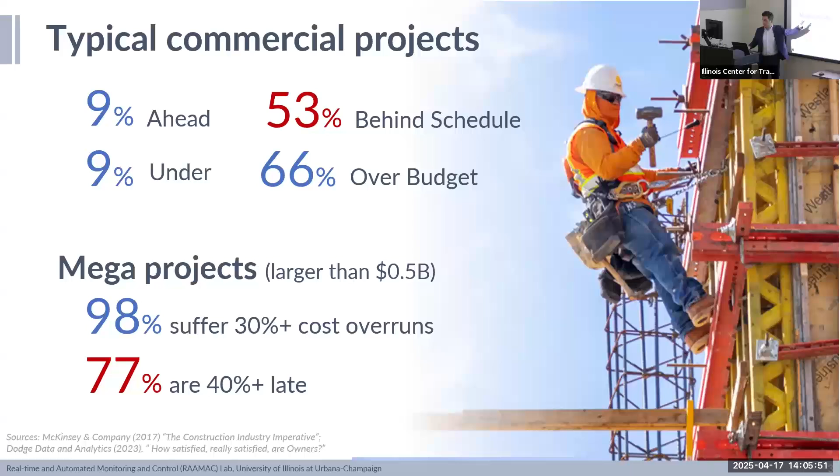Every single day, Meta does $60 million of work. $60 million of work a day, before 5 p.m. That's how much money we spend on construction. So you can see how this coordination issue and keeping their projects on time can make a huge impact on work in progress. Now, many of you have a transportation background, and some of this might be relevant to you, but if not, I'm basically giving you a glimpse of what happens in construction.

Every project that we do always starts with a plan. We go and execute that plan, and from time to time, we check to see if we can compare what really happens out in the field against that plan and make adjustments.

Now, over the years, we've added new theories in construction. One of them is what we call last planner. Anyone who's been on the job site might have heard the term pull planning. It's a practice of bringing a foreman to a meeting, that's the gathering of planning and execution that you see on the side. But the gist of it is, all we are trying to do is understand how we can find the delta between reality versus the plan and make adjustments.

Within this workflow, there are 4 specific problems of why projects are falling behind schedule. Number one, like I said, over the past few decades, the broader scientific community in construction worked on a number of theories called last planner, which the idea was really, really simple. Instead of running a team by having someone come up with a schedule, ask the people who execute the task to give you the estimate of how much work needs to be done.

What really happens is you take a team that does, on average, let's say 1,500 to 2,000 activities in the life of a project, to a process where now you do 20,000 activities, that you need to coordinate, who does what work in each location. Every one of these sticky notes you see is actually one card that shows you one company doing one task a day, and that's the practice that we have. When you want to coordinate this much work, you need to have someone as a champion on the job site to guarantee and communicate the work that needs to be done.

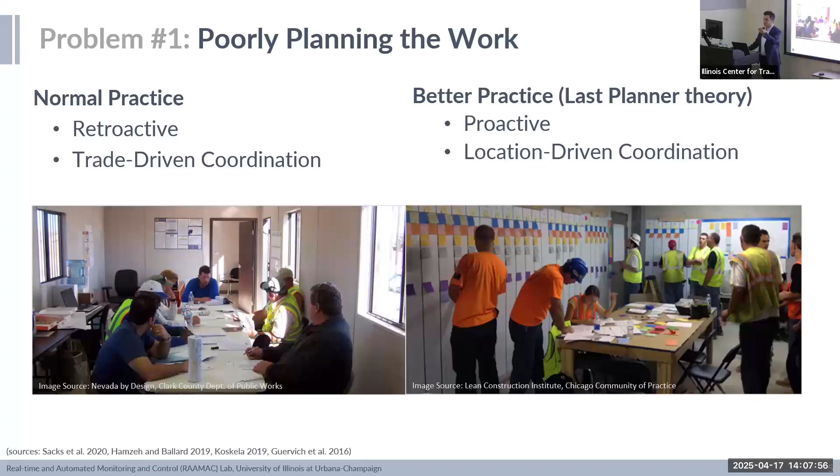I'm just making fun so I can engage in conversation. Not only are we not necessarily good at planning, but when it comes to executing our plans, there's a lot of room for improvement. Over the past 15 years, I've been surveying every superintendent in construction on why things aren't working according to plan.

They give us feedback on all sorts of things. They show up and the work plan has changed because the project manager decided on a different approach. You show up and another subcontractor has occupied your space. Resources might not be available to you. If you look into these reasons, almost 80% of these issues are preventable.

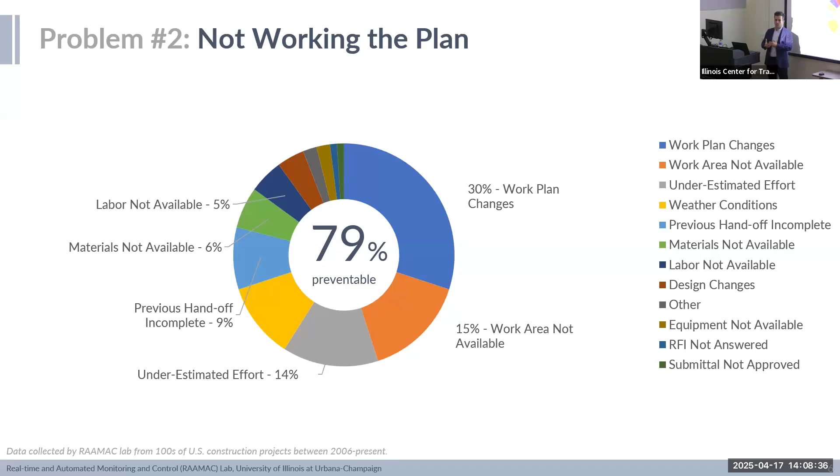The problem is all of our projects are understaffed. So people on the job site don't get visibility into what's really happening there, so they can't react to it in a timely fashion.

Third problem: the way we monitor construction progress on job sites. How many of you have walked into a trailer and seen a 2D drawing on the wall that's been color-coded? Anyone? That's the first thing you're going to see if you ever walk into a job site.

Now, I say modern EV plant—I know this is being recorded, but my understanding is it's for affiliates of our program. This is a Ford facility in Michigan. It's an EV plant, a very modern plant planning to build the type of vehicles you do research on. But looking at the construction practices, this is the same as they've been doing since the 80s.

You wait for the entire week, contractors show up in the room, and you ask them to color code the areas they've been working on. So from the time the problem happens to the time you get visibility into it, you've effectively lost a week of time.

The last problem: not only do we have problems with the way we plan, execute, and monitor, we don't even use that data to update the plan. The people engaged in planning are usually not even on the job site, so they're always missing that feedback loop of how much work really happened there to use as a basis for updating the plan.

Now we call that engineering judgment, but it's really just a gut feeling of how much I think everyone can do on the job site, so I can come up with that plan. So again, there are 4 specific problems: the way we plan it, execute it, monitor it, and use that data to update it.

So we put ourselves on the path of solving these problems with only one form of data—a type of data that, if you put it in front of a superintendent, an owner, or a designer, everyone understands how much work has been done, and you can contrast it against your design. That form of data is visual data.

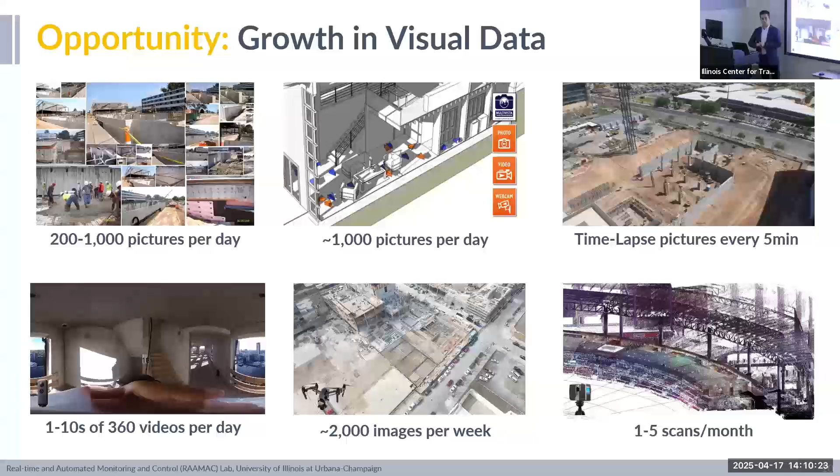So what do I mean by that? If you ever come across job sites, you're going to see people taking photos. The most dominant form is using a phone, walking around the job site and taking pictures. How many of you have used your phone to take a picture of a job site or visit you had? All of us, right? That's the same in construction.

For liability reasons, many owners in the US and overseas hire professional photographers who walk the job site and take photos for them. Any guesses how much money these guys are making on an hourly basis? Pick a number.

Go up. How much do we make as GRAs? 20, 30 bucks, right? So let's have a benchmark. We pay $200 an hour for professional photographers who show up on the job site to take photos for liability reasons. It's a good opportunity for this summer.

We also have time-lapse photography. Many of our job sites have fixed cameras, and we also use them in transportation projects. Superintendents love to use action cameras—these are 360 cameras you can easily place over your hard hat, walk around, and videotape.

Construction is the #1 market for drones. It's larger than agriculture, it's larger than transportation. And we use a device called laser scanning that's also used in transportation. This is less frequently used, mostly for high precision tasks, but these are all different forms of visual data.

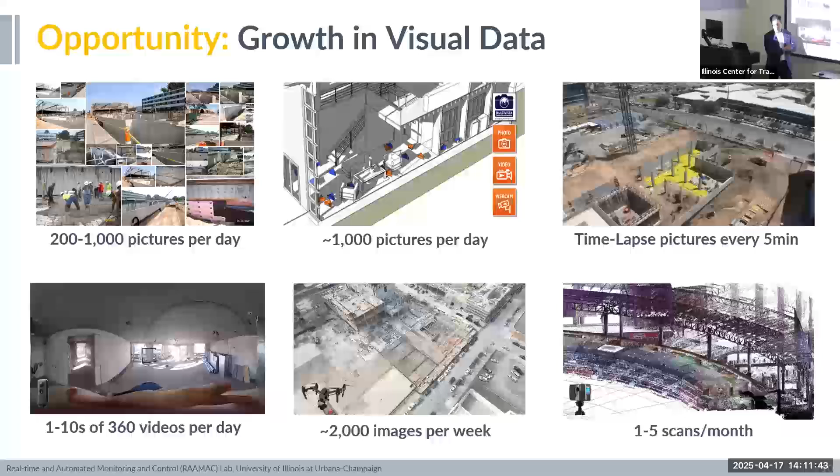So what we wanted to do is see how we can take this data and use it to represent what really happens on the job site, and then use that to communicate what work is coming up.

On the other side, we had to look into what we can bring from a design perspective. Over the past two decades, we've advanced a concept called building information modeling. I'll show you some examples in the world of transportation. It's not very dominant there because conflict resolution in engineering doesn't take as much effort as it does in building, so it creates more value from a building perspective. But it's still something people explore in transportation too.

The idea is very simple: you take that design model, take a project schedule, and integrate them so you can create a sequence of the work. Before the job starts, you can use that to coordinate and communicate what work is coming up. Over time, you can use it for constructability reviews, safety reviews, and so on.

I want to give you an example—I try to bring as many transportation examples as possible. This is Oakland Bay Bridge in California. You can see what Caltrans, together with AECOM, had done at the time. Here you can see the animation of construction, and you can also see active traffic. We actually use data from traffic engineering estimates to understand how to make the job site safe during construction and to look into constructability.

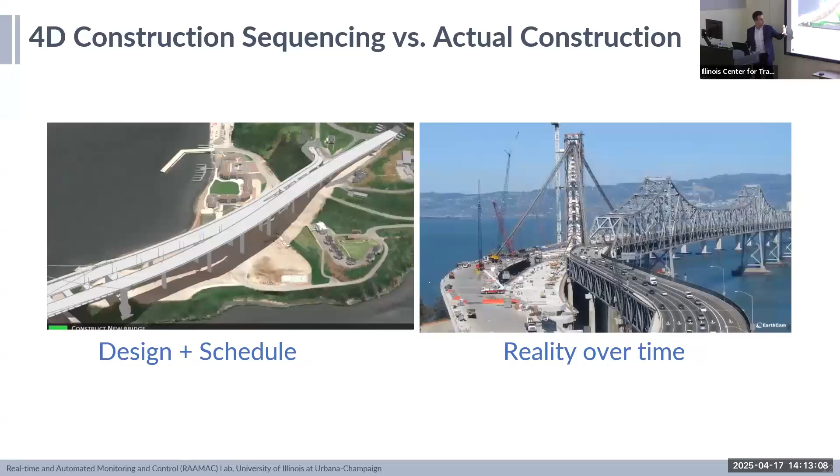On the other side, of course, you can see the reality. So the idea is to see how we can bring this animation and visual data over time into the same scene. And here's the idea we put together.

We thought, what if we come up with a technique that first and foremost can make every picture measurable? So we can click on this picture and say, I want to see the length from this safety cone to the other safety cone. Second, we wanted to see if we can automatically bring design as an overlay on top of the picture.

Third, have a schedule tied against that model. So at any moment in time, you see what is being planned on the job site against the reality of the site, and any deviation between the two would be color-coded.

What do you guys see? Areas that are color-coded in red—maybe those are areas that are behind schedule. So when we go into the coordination meeting, everyone is on the same page about what work was promised and how much work has really happened on the job site. Any questions so far? All right.

Now I want to take you back to what I mentioned before. Remember the cycle I showed you about planning, executing, monitoring, and controlling? This is the same cycle. If I can bring design plus a schedule, which we now call 4D BIM—fourth dimension being time—I can use that as a base for reliable planning.

If I can figure out a way to make my pictures measurable over time, I can generate a reality model of the job site that captures what really happens, in a measurable way, on the job site. Then I can twin that against the design at a high frequency.

There are two requirements for the definition of a digital twin: one, it's a digital representation of the actual job site; two, it comes at a frequency. So I can tie the two together to better coordinate and communicate what work needs to be done.

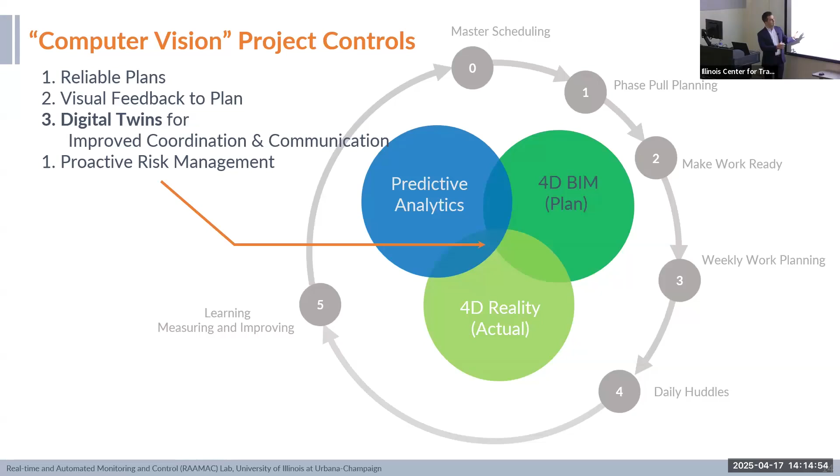Then I can apply more advanced analytics, find the delta, and maybe forecast the future. So this was the idea we had—basically transforming the cycle of project controls into something driven by computer vision.

Fast forward to today, we've expanded this capability, and it works with every device in the market. I just wanted to show you the most dominant hardware—my work never gets into the world of hardware, but this is what we have to interface with. 360 cameras—people love to use them because they're really easy to use.

Drones, even though we have a lot of regulatory requirements around drones, are still very heavily used for larger scale. We love to tap into videos from phones, not the LiDAR, because not everyone on the job site has that LiDAR. And of course, on the more extreme side of it, if you guys have rented any apartment in Champaign, you might have had a virtual tour. This is that device that gets used for that. And of course, laser scanning.

So essentially, regardless of how pictures and videos are being taken, we would create a time machine for you that would be measurable. Now, you would never find a job site that would only use one form of this visual data. There's always at least two forms of them used at the same time by different trades that you have.

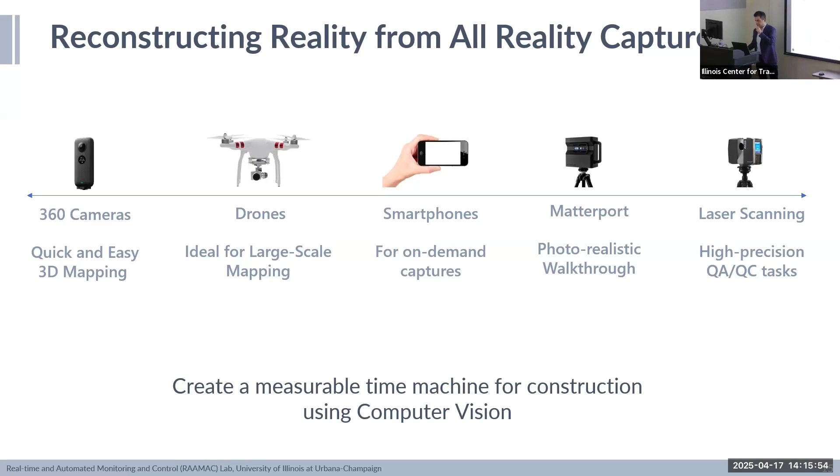Let me see if I can advance this slide here.

All right, so what is the idea? I'll get into some of the details at a later time. The idea is that from that collection of photographs and videos that we're capturing, at any moment in time, we want to see if we can generate a three-dimensional model of the job site. This model you see on the screen is called a three-dimensional point cloud, a cloud of three-dimensional points. We also want to put that on a timeline slider.

So these orange dots you see down on the timeline, each of them will be one day that the team on the job site is taking photos or capturing videos of the job site. This project is actually Centene Tower in St. Louis. This is a project that's already completed, and Clayco Construction used this technology throughout the project.

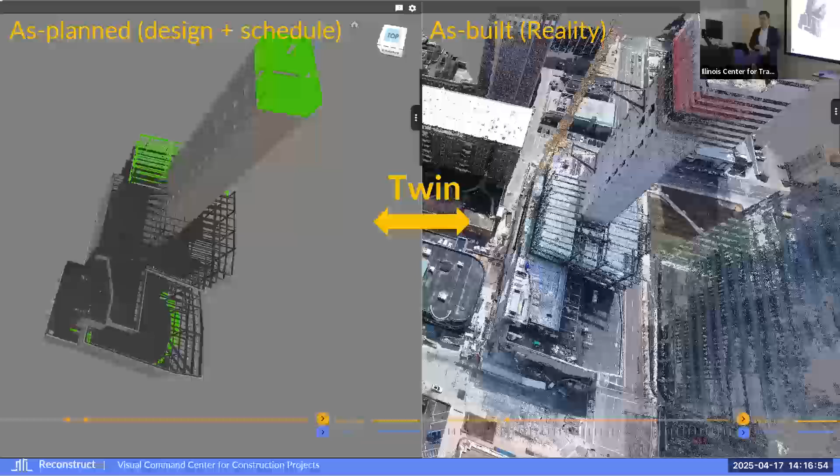Once we achieve that, we want to bring in the design at whatever level of abstraction that you have. Then we're going to tie that against the schedule. So at any moment in time, you see what is being planned, which we call the as-planned conditions, against the reality of the job site, which is the as-built condition. And then we want to see how we can twin them against one another in the same coordinate system. So now everything will be sitting in the same coordinate system.

Because that point cloud model has been generated from photographs, we can back project the design on every photograph based on a mathematical formulation that I'm going to show you in a moment. That means now your design plus the schedule will be overlaid. From a contractor's perspective, you show up at the job site, this is on a large monitor, you say, hey, let me see what companies are going to be working on my site today. We have Concrete Strategies, we have Harmon.

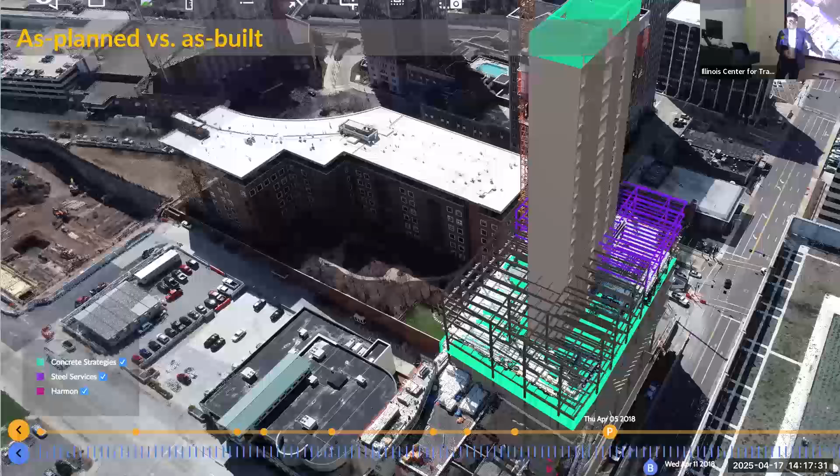The model carries the quantity of expected work. The visual in the background shows you the actual quantity, so you can start measuring real work against expected work and do that coordination better and better. Over time, I can start color coding. I can color code locations. I can color code work packages. I can color code contractors that are on schedule and behind schedule. So for example, you see the podium deck in this case color coded in red for areas that are behind, and some areas might be on schedule.

Down here, you can actually see the schedule. So again, it shows you the timeline from the reality perspective against the design. Now, if you can also start tracking performance in terms of production and even better productivity, maybe we can forecast the future. Now, we are not in the business of forecasting all types of risks that can happen on the job site. This needs to be something that's realistic.

So all we are trying to do here is take the data over the past 3 to 6 weeks on the job site in terms of how much work has been done. And we are only forecasting in the next 3 to 6 weeks on locations that we think are likely going to fall behind the schedule. So I'm going to use my words again carefully: locations that are likely going to be falling behind the schedule. So we can color code and say, when you go into the coordination meeting, you should focus on that location because you're likely not going to be able to get your tasks started on time.

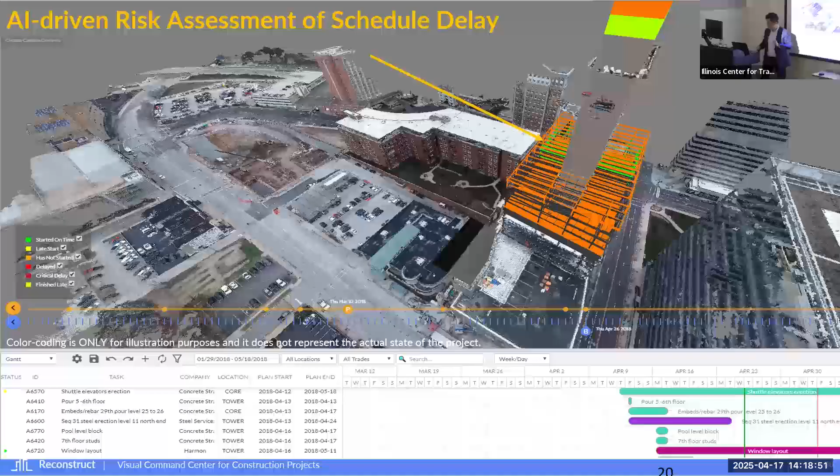So I want to take you back to the basics of construction. This is what it means. You put it in front of a group of people. The system is highlighting two locations that are color-coded for risk, red and yellow.

And everyone in this meeting is having a conversation around what are the areas that are at risk, what tasks do I have that relate to that location, and how can I be part of this collaborative discussion on revising the plan so we can prevent a delay from happening as opposed to reacting to it.

Okay. Now, putting that sophisticated concept aside, we always jokingly say everybody's paying attention except the fellow who's on the laptop or tablet on the lower right corner, right? It's visual. It catches the attention of everyone, obviously part of a coordination meeting. Any questions so far? Now, this is at a high level what the idea is.

So now wearing a little bit of academic hat, now you may say, all right, so what is the exact process? What is the underlying science that actually generates this type of technology? And what is the mechanism of going from a group of pictures into a three-dimensional model against the design model, right? So, fundamentally, I want to take you back to the photo that I showed you before.

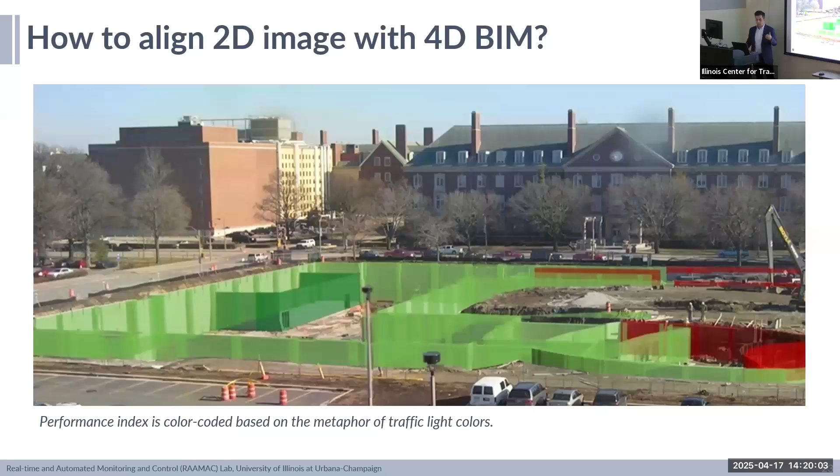How would you align a three-dimensional model against this picture? Not only you need to do this per individual picture, but you also need to repeat that for every one of the photographs you have on the job site. So this is the task, provided with a group of pictures, a 3D model. Any ideas?

All right, so you may argue and saying, yeah, you know what? What if you put a GPS tag against this picture, right? What kind of tolerances do you get from GPS, right? Given the line of sight, for those of you who've done staking in transportation or you've done surveying, you can imagine it creates a deviation against it.

So GPS is not available on a lot of our videos and images on the job site for all kinds of reasons. Two, if you want to make an alignment, you can argue that I'm looking for a number of visual features and I'm going to go ahead and align them against the design. But what is it that we do in design? I'm looking at you guys because most of you guys have been in the world of design.

Design is an abstraction of the real world. What we present in design doesn't match the reality of the job site. So we need to figure out a way that we can define features from that world, from a computer vision perspective, that would actually match mathematical description that we would put into features from a visual perspective.

Now, I want to mention this a little bit more from a computer vision perspective. In computer vision, we take every image and we use different types of camera models to model them. One popular model is called a pinhole camera model. Each and every one of these images would have a few characteristics that we need to learn about. One, we need to understand the focal length.

We need to understand the skew. That means what kind of shear we get from the video. We need to understand the geometry of the optic center. At the same time, we need to understand extrinsic parameters that are dominantly rotation and translation of the image against some coordinate system. So you're looking at 11 degrees of freedom.

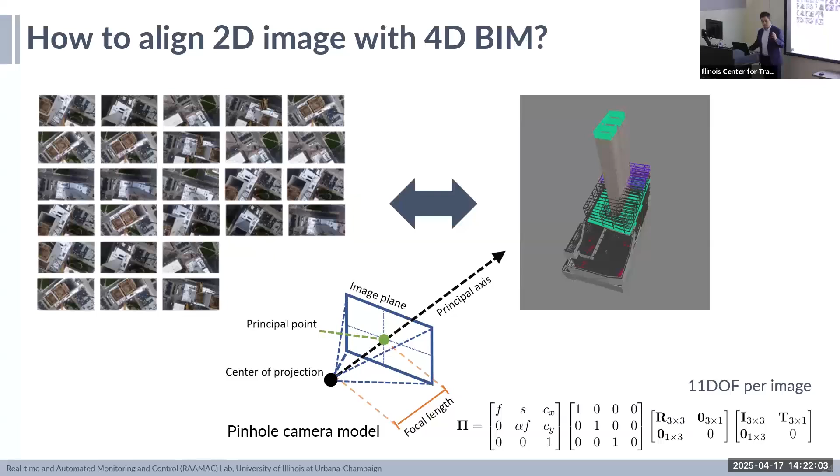So we thought, okay, well, this might be a very difficult problem for us to solve, but let's look into it from a different perspective. These images, we have so many of them that naturally they have an overlap against one another. What if we try to understand the structure of the scene from the motion between these images that can be modeled, a science called structure from motion?

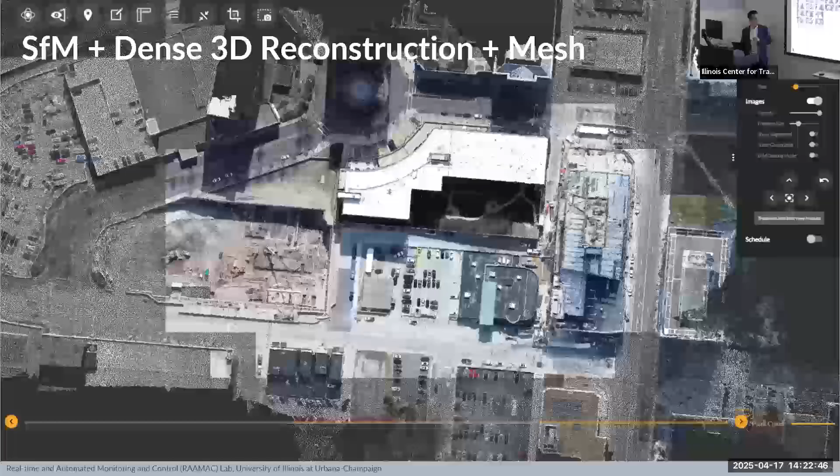So now I'm going to generate a three-dimensional representation of the site, not because I need that visual, because it actually glues all my cameras against the same coordinate system. So every one of those prisms or frusta that you see up on the screen would be one of the locations of my images. Now this problem would be 11 degrees of freedom per image, but you also have 3 degrees of freedom per point X, Y, Z that we need to map in the scene. Fast forward, we have about half a dozen publications over the years that we published on this.

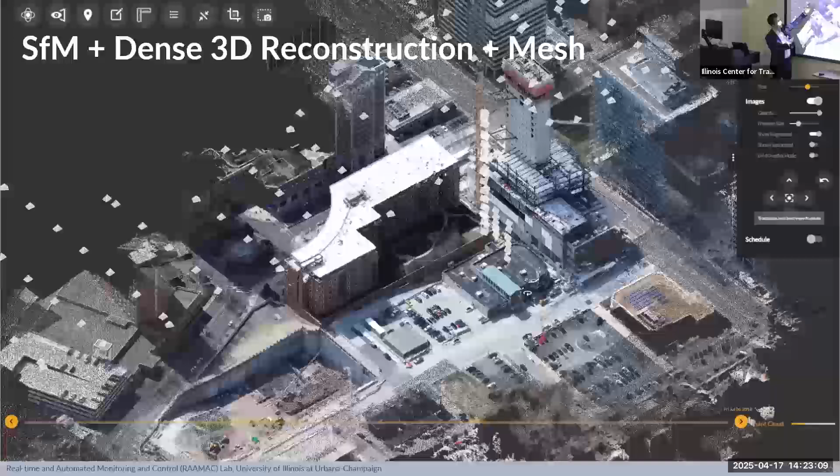That was actually the first IP that we brought into the technology. This is how it works. You provide a group of pictures into the system. It goes into a number of steps of a standard structure from motion pipeline. We changed the algorithms that people use in the world of 3D reconstruction to densify it by making the compute time linear. And we added a number of meshing capabilities to fill in some of the holes that we have.

So this is the real life experience that you're going to get if you put it on a web-based viewer. The idea is that you have the 3D model. You can click on any location. With some computer graphics algorithm, you can actually overlay the image on top of it in a memory efficient way. And now you see this fellow is putting up the measurement tool, and every pixel in the image becomes measurable.

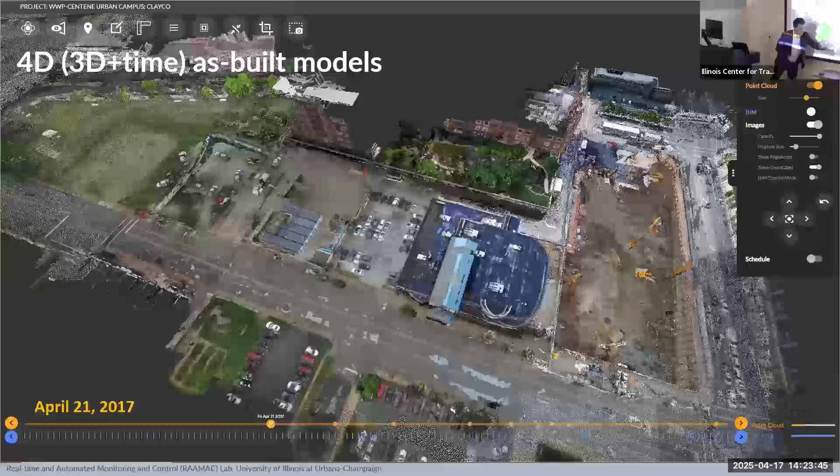So I can solve this problem. I need to figure out how I can align this over time. Look at the date, April 21st. Every one of these orange dots you see on the timeline would be one of my capture days. And I'll show you the trick to getting these aligned. We came up with an algorithm that, depending on how much of the site is being captured, looks into the past history of the site as a dictionary, and we see if we can find the same type of features over and over. And over time, we generate what we call a four-dimensional reality of a job site.

Okay. Now, some of you may be using computer vision algorithms in your work. We've actually changed our bundle adjustment process, and we're constraining every reconstruction against the one that we had from last week. That's the easy trick. Now, there are moments when the site drastically changes in terms of progress, and the algorithm fails. That's fine. You come with an interface where the user can go back and fix the alignment over and over.

Now, here's the next piece. We need to figure out how we can do the alignment. Over time, we've come up with many different algorithms to do this alignment, but I want to take you back to some of the fundamentals that we use in civil engineering. We love to do everything based on control points. That's what we do in transportation. That's what we do in construction. The idea is that you define a number of control points in your design and a number of control points in the real world. And all we need is to solve for the similarity transformation that only has a few degrees of freedom. That means only 3 points.

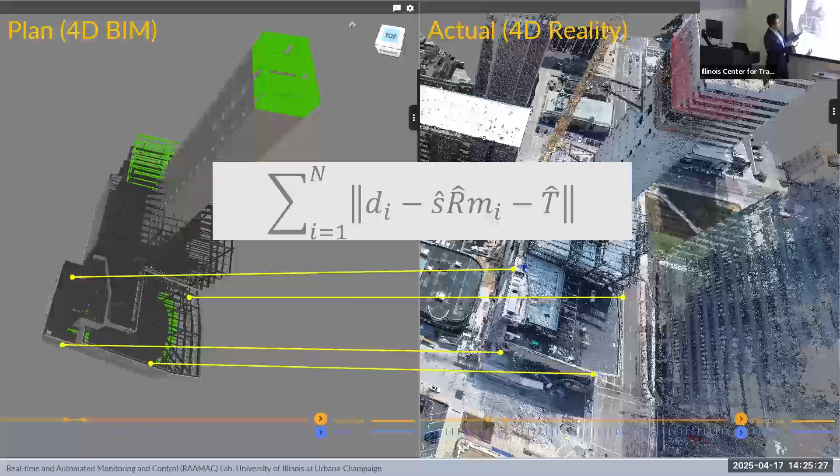As long as you get 3 control points, you can transform your unknown coordinate system into your design coordinate system. Now, I jokingly say we usually don't have these problems in transportation, and today I want to confess that's true, because in the world of transportation, your design is dominantly based on a real coordinate system. Everyone who works on non-transportation projects is always in some arbitrary coordinate system, regardless of whatever we try to do in execution planning. So we've come up with a number of algorithms that can facilitate this process for things that are not based on a site coordinate system.

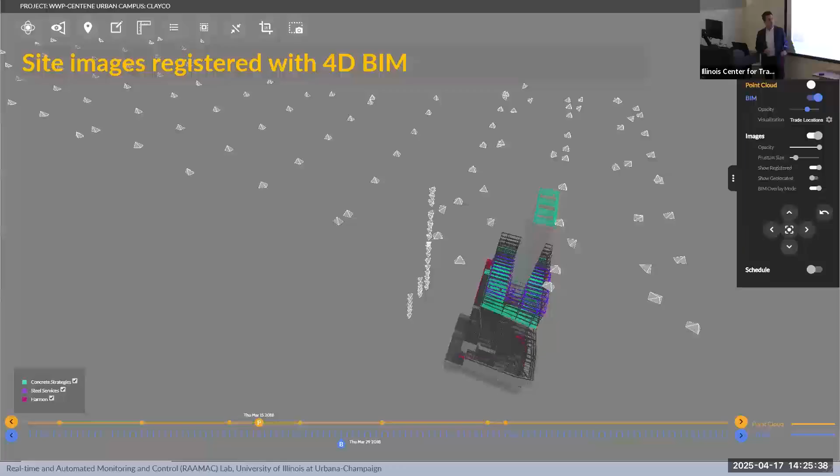What it does is bring your design into the same coordinate system. And remember the photographs are part of the point cloud. I've turned the point cloud off. Now it's all part of the same coordinate system. These are where images are located. That's your 3D model. So you simply back project that 3D model onto the image, and you get those views that I was showing you before. All right, so that's basically the trick behind getting this to work.

So back in 2014, 2015, we brought a lot of these algorithms into maturity. Gosh, now it's almost 10 years. And we started putting them into practice. Many of these practices were prior to FAA Section 107 and Exemption 333. That meant we needed to hire a pilot to operate it. And we started testing it at scale.

We actually did 126 captures with the first iteration of the more mature algorithm, from Sacramento Kings Stadium projects to projects on our own campus, to projects in Chicago, Miami. That project is actually with Taisei Corporation in Japan. This is one of our donors on campus, W.E. O'Neil. And immediately we learned that, although we've brought some of these computer vision algorithms into the practice of the built environment, there are a few issues that we're facing.

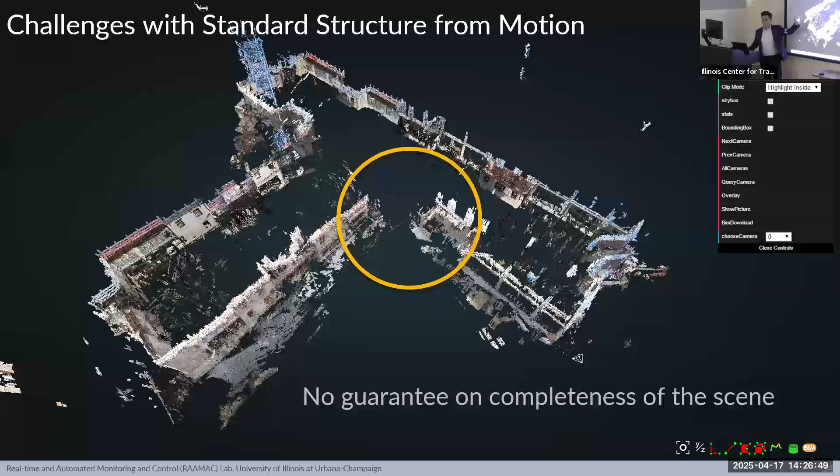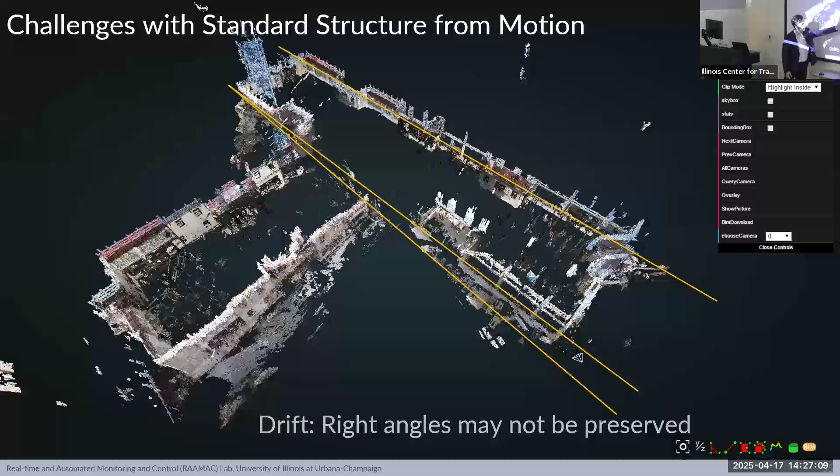One, there's never any guarantee that the models that we generate are going to be complete, and you would get these holes in the model that become questionable and can even challenge your auto alignment practices. Two, because you're working on a numerical optimization process, your algorithm may get stuck in local minima, and because of that, you may have a drift. And this drift varies based on capture practices that we have, but right angles may not be preserved, which is a big issue for us in construction.

And the third issue, remember I said images, they don't have any coordinates associated to them, they don't have any GPS. So the models that we're creating are up to scale. That means on their own, they're not measurable. You need to offer reference to fix that issue.

So that was a moment in time that we realized, okay, everything in the world of construction starts with the design. What if we go back and take our concept of design into the world of computer vision and transform the way we think about image-based 3D reconstruction and use that design to assist that process? That was the question I wanted to ask. By the way, this is something that we published at SIGGRAPH, a dominant computer vision, computer graphics venue. So the idea was very simple.

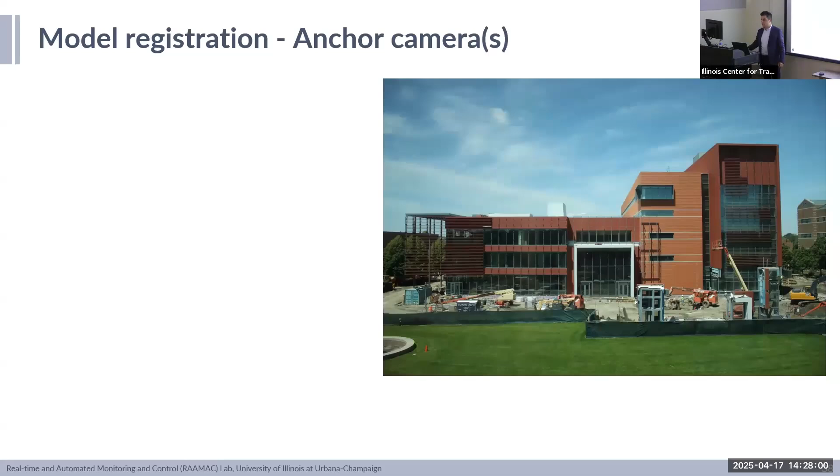You remember we used to do the BIM alignment post-reconstruction, right? We reversed the question. We said, what if upon initiation of the project, we looked into solving the alignment problem using a Perspective-n-Point algorithm? That means I need a number of points between my 3D model and only one single picture. And I'm going to go ahead and solve through this formulation I'm showing you on the screen to bring that design into alignment against the picture.

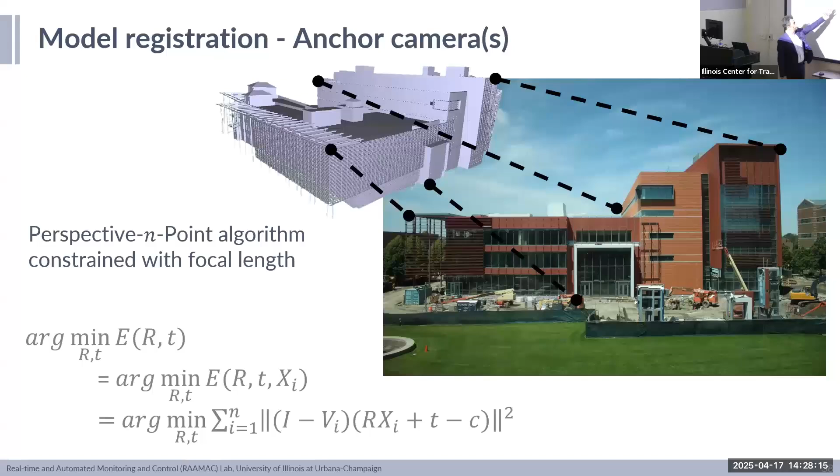Let's see what happens. I'm basically going to use a user-guided input, and I bring the design into alignment, and I'm going to treat this image as an anchor image against the rest of the photographs that I have. Does anyone recognize the building I have on the screen? This is ECE. So this is the time that ECE was going on the construction, and we actually did the testing on campus.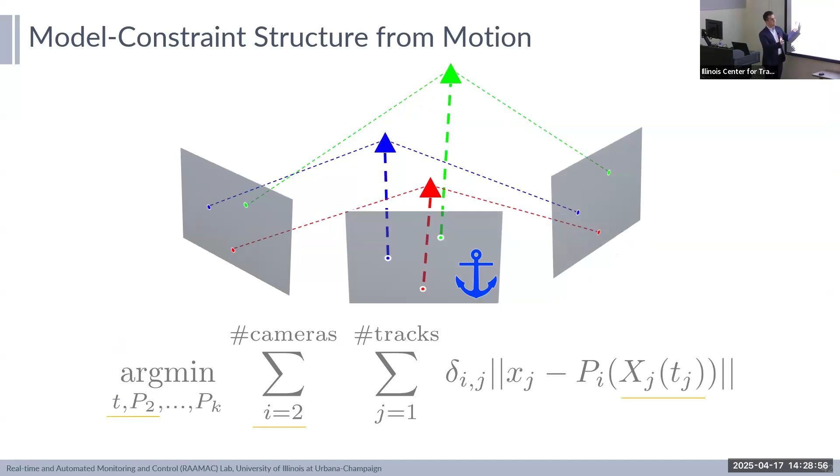So basically, here's the idea. In that bundle adjustment process, and again, I haven't gone into a whole lot of detail, I'm only showing you a snapshot of one of the algorithms here. The image that has been associated with the 3D becomes an anchor. And we use that as a constraint to make sure that when we're trying to optimize, we keep that fixed and we only rotate and translate the rest of the scene against my anchor point.

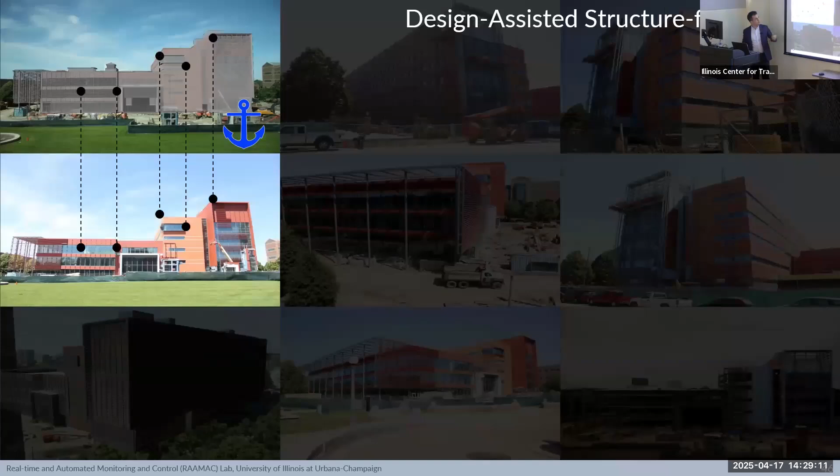So this is what that process would look like if you want to expedite it. You solve for the feature track generation process, you anchor that image. Because your features have already created tracks against one another, you simply transfer them into the next image, use the same PnP, you place the BIM model on the next image, and so on. This process can actually be done within a few minutes, so we can automatically figure out what are the images that may not immediately get registered. So we provide that again as feedback to the user. The user provides that fix for us on that model.

Funny, you see this image that did not align is the exact same view as the one I'm showing on the left. Can anyone guess why? There's more progress made in that photograph, right? So the visual representation of our feature descriptors are totally different. And for those of you who may not know, basically what we are trying to do is capture changes of color intensity or changes of brightness intensity within a neighborhood in a 128-dimensional vector. That's all we learn. And it needs to be fast enough that we can do this for every image. And you have roughly a few thousand of these features per image. So again, you provide the input and that anchors it.

Now we realized that for the first time, we've actually taken a concept from the world of civil engineering to computer vision. And if you want to publish it, we cannot publish it with our own data set, which we would have loved to do. We have to go back and benchmark against what is commonly available in the world of computer vision.

Now, this is a data set of dinosaurs and temples and all that people use in the world of graphics. People have mock-up models and they love to bring them into movies. So they actually scan them and they compare algorithms against one another. So as you can see, the two metrics that we use are to figure out how we can minimize our localization problem, which is minimizing the placement error of the image in 3D by measuring our translation error and rotation error.

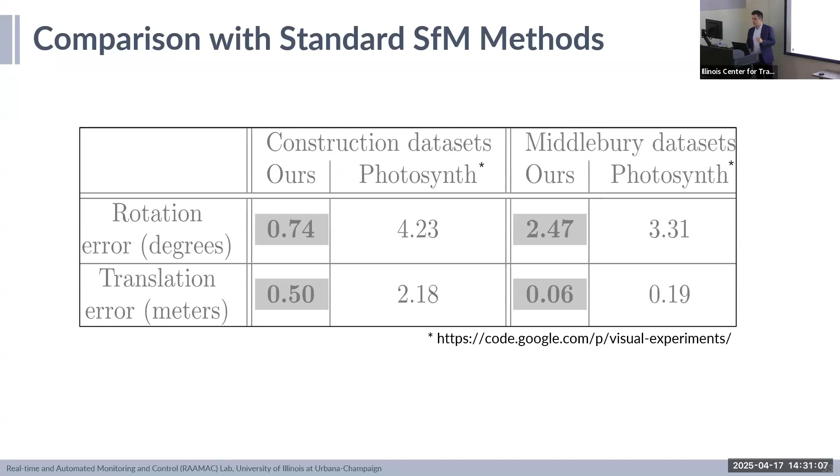Now, this system that we benchmarked against was based on a paper from University of Washington, Photo Tourism. And that was the basis of Microsoft PhotoSynth. So at the time, the benchmark was the PhotoSynth system. So again, we display that this improves it. But for us, again, I want to bring it back to what our problem was.

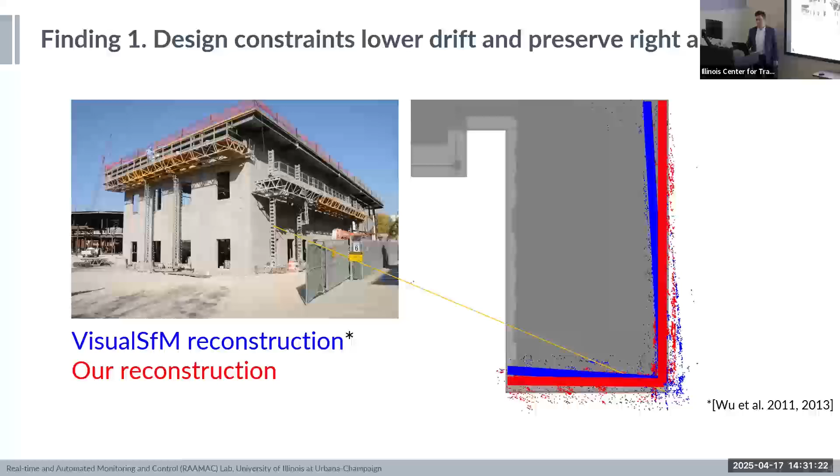Our problem, you remember the drift I was showing you moments ago? You can actually see what that drift would look like if you use that standard structure from motion process. But if you constrain that against the design, you can go ahead and improve that. And the likelihood of that would go down. And because you're using that constraint, our 3D reconstruction is likely going to give you a more complete picture of the scene, as opposed to what typically happens with any standard structure from motion process.

All right, now I want to take you back to a slightly higher level. So I only showed you one workflow so far, which is taking a group of photos and videos and putting them into a system to generate that time machine for construction. Fast forward, I want to show you the solution that has become commercially available. The company is owned by University of Illinois. So if I'm advertising, it's because the university owns it.

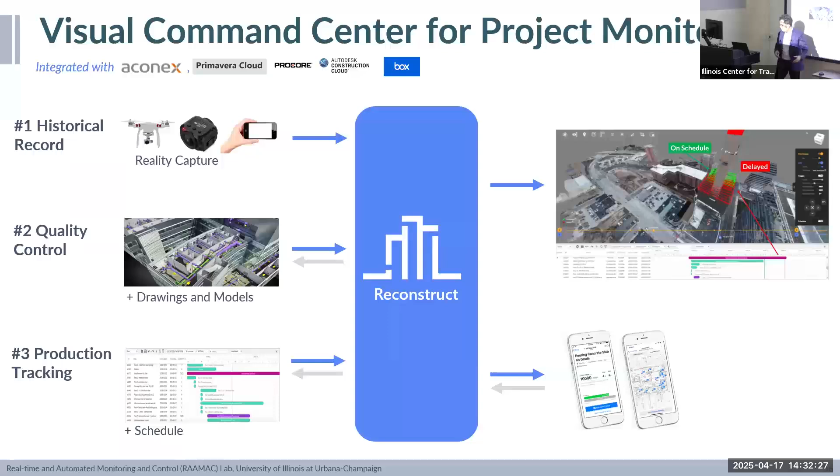And there are three capabilities here. You can bring your photos on their own, use them to document both condition assessment and construction progress on the job site. You can bring your design, both 3D and 2D, and you can also bring the schedule. The entire interface is web-based by design. So you have less memory to use and less GPU to use for rendering purposes. And of course, there's a number of mobile interfaces that help you go back and forth between different users.

We've used this with many, many different partners and many, many different companies. Our biggest partners that have been helping us on selling are the dominant companies that you know from the world of design. For those of you who may have some interface with the world of insurance, there's a lot of application of what I'm showing you for the insurance world, specifically subcontractor default insurance, meaning you insure yourself against a subcontractor going bankrupt. So that's why we have that partner, Aon.

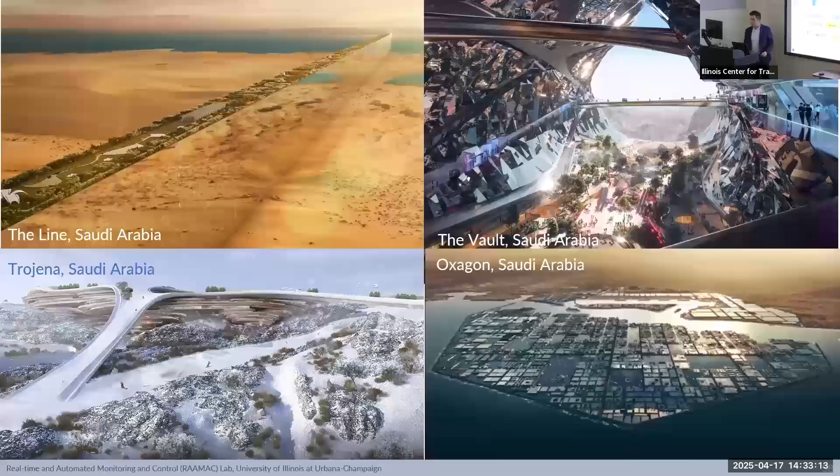And over here, I'm just showing you select companies so I can show you examples of rail projects that we worked on, data center projects that we worked on, hospital projects, and some unique job sites that are more on the theme parks. The ones that I'm mostly excited about these days are the projects that we engage in Saudi Arabia. I've had the opportunity of traveling to these job sites. These are all designs. That's not the reality of what's going on there right now.

This is The Line that I know many of you are probably very interested in. This is the Vault, which is the gateway for this project called Trojena, which is a ski resort in Saudi Arabia. And that's the place where the 2029 Asian Winter Games would be hosted. And this is a floating city called Oxagon, all in the Red Sea area. So some examples of these projects.

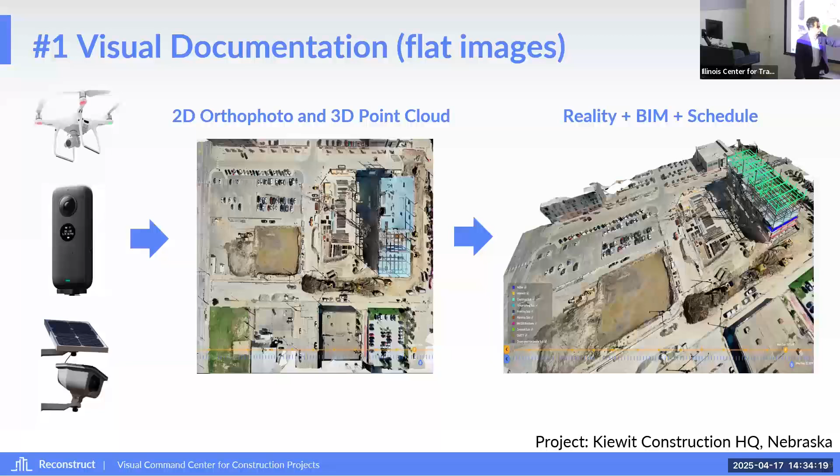So fast forward, this is how exactly the solution works. The most dominant forms of captures that we've seen are drones, 360 cameras, and this is actually something that we came up with. This is a time-lapse camera, this is solar powered. You put it on a tower crane. If you can't use a drone, every single day, the tower moves about the job. We put it on a trolley, so it naturally takes time-lapse photos. You put it into the system, it generates a measurable model. Now you can go ahead and overlay it. This is actually the headquarters of one of our customers, Kiewit Construction, that uses this technology.

Here's another example of showing this at scale. This is a Microsoft campus in California. The owner rep is a company called OAC Services out of Seattle. They want to have visibility of what's going on at the job site. So you can see the density of the captures. Almost every other day, they were actually doing a drone capture on this site.

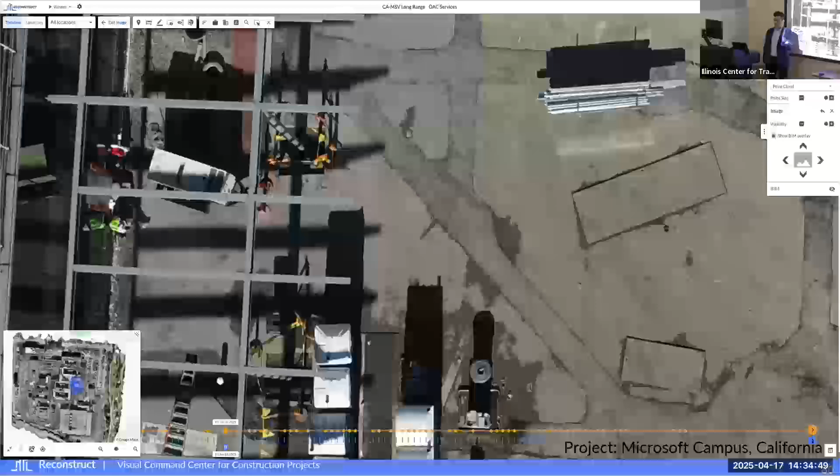So the idea that they had was to have remote visibility of what's happening down in California so they can expedite payments for the contractors. That's another big issue that we have in the world of construction. But simply, as you can see, there are 18 buildings on this campus. You click on a location, the capture that you have with the drone will be transformed into a measurable experience. And you can obviously see that in what I have on the screen here.

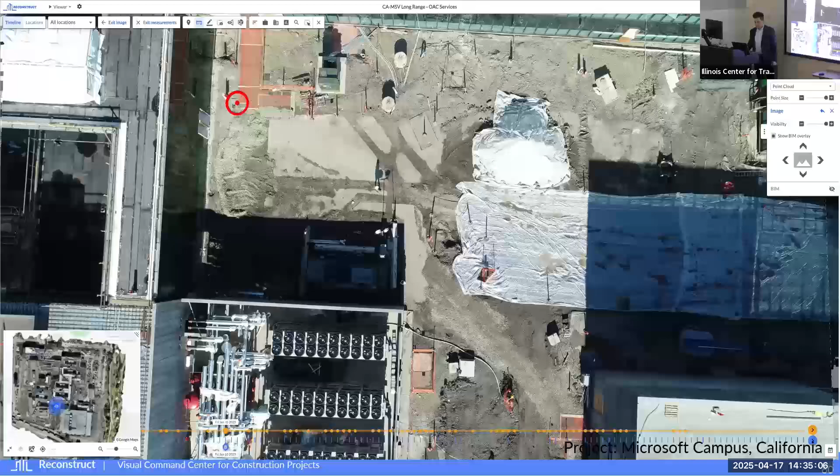In early days, our most dominant form of capture was drone, and drone was automating the capture. But every few years that you put things into practice, people want something that's easier, cheaper, faster to use.

These 360 cameras came out. These are the ones we place on the hard hat. How many of you guys actually have 360 cameras or use them? If you ever walk on a job site, I can guarantee almost 8 out of 10 projects you visit would actually have these cameras today. They're really, really popular. You put them on your hard hat, you walk around, it captures what's in front of you, left, right, top, bottom, in one walk.

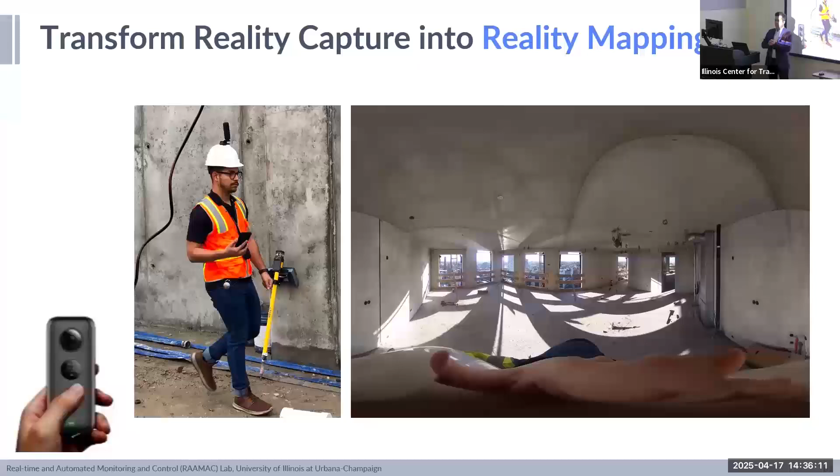So it minimizes time and cost for FTE. Your full-time employee doesn't need to spend time doing a lot of capture. Plus, in indoor environments, a lot of safety managers on job sites would not allow you to fly drones, for 2 reasons. One, you don't have GPS to navigate the drone, autonomous or even manually, on the job site. Two, drones have magnetometers. When you keep the drone close to a steel structure, which is something you see a lot on job sites, it would actually throw off your navigation system altogether, so it's very likely you'd have an accident on the job site. So again, this became very popular.

What we've done with it is extend these algorithms and take the video feed from these devices, and we automatically generate the point cloud as before. We offer walkthrough experience, but we also map that in 2D, so we can actually generate an ortho photo that we call an as-built floor plan, and that can be matched against a 2D design too.

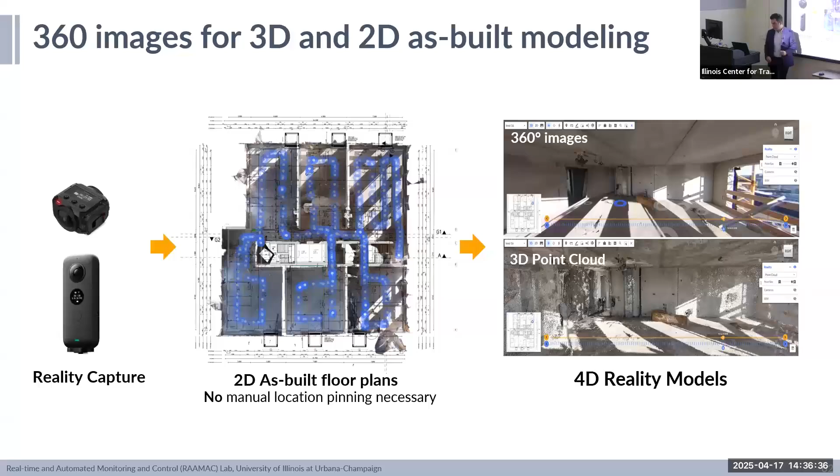I'm going to give you a quick demo of what this experience would look like. For those of you who've used Zillow or Apartment Finder, you're familiar with this experience. The difference is those experiences are created by devices placed on a tripod. Each scan is 19 seconds, so it takes a lot of money and time to do the capture.

Here, you're just cruising through the site by walking around. This is the floor plan that the video is automatically generated into. The donuts are frames that are selectively extracted from the feed. You click and navigate from point A to point B. The image is entirely measurable, so you can measure your drain pipe against the joint that you see over here. And there are all kinds of measurements. You can teleport yourself from point A to point B.

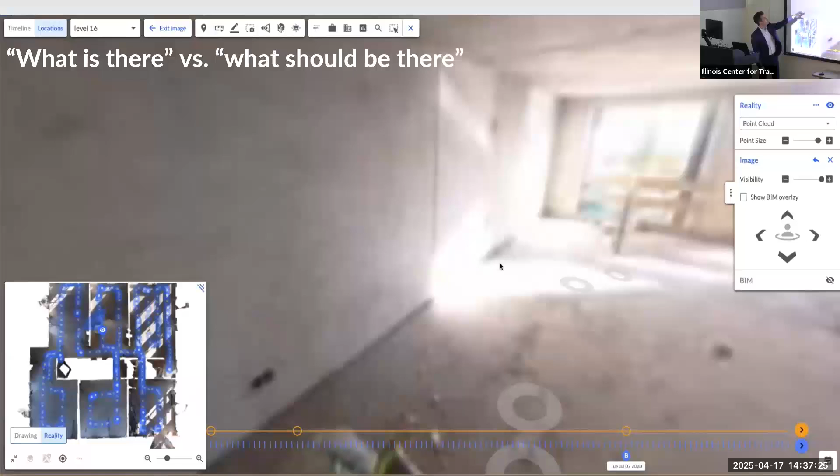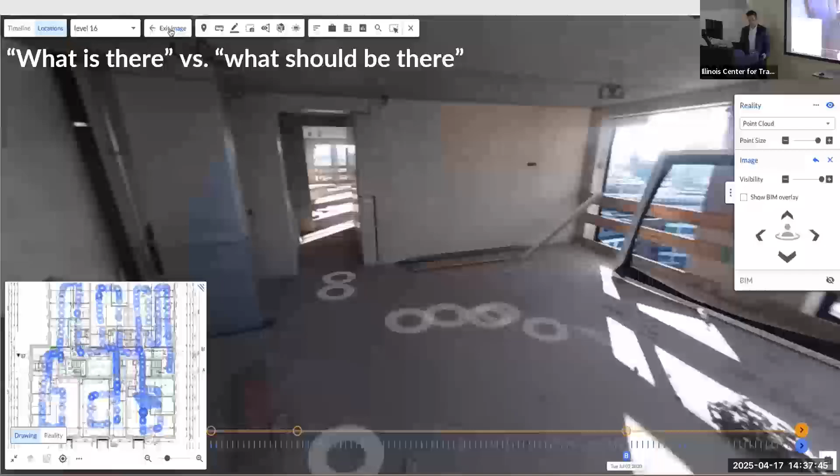The date is shown at the bottom of the screen, 2020. Location is level 16. This is actually a project in the Netherlands that the contractor VolkerWessels was using the system on. You can also switch to 2D, and I'll get into this in just a moment, but basically now you can see your walkthrough path against that 2D environment, and do the same type of overlays I was showing you moments ago.

Now, as we started scaling this technology, we realized that many projects, while the design starts from 3D, when it comes to construction documentation, they go back to the world of 2D. 2D are the most definitive views we have from a design perspective, and from an engineering perspective we put a stamp on it. So now we had to worry about how do we make the system work purely based on 2D without 3D systems.

I'm showing an example of another project and I'll explain how the process works. Here's a point cloud generated from a 360 camera walkthrough, mapped against 2D. This is actually a McDonald's store - McDonald's is another company that's been using our system on their job sites. When you show this point cloud to users on a job site, they feel like they're looking at a pixelated image. This is where your design of system comes into play.

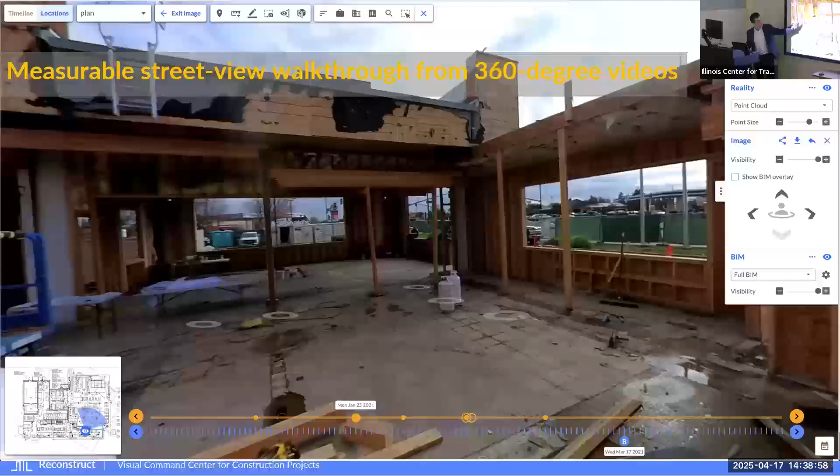So we've actually changed this interface, and we basically offer the same street view experience that is very common in the world of transportation, but now for the world of buildings. You stay in the image, you do your measurements here, you click on the donuts, and you can walk around. And if you remove that image, this is what's happening - you can contrast between the image versus the point cloud, all geo-registered against the 2D drawing.

Now, the basis of the algorithm behind it is really, really simple. When we generate a point cloud, we actually project it in the world of 2D.

Then we perform a simple set of feature detection. Our features are edges, points, and blobs, and we like to get a lot of those. We try to fit a model that would transform your 2D design or the camera path shown with colors against that 2D. We use a model fitting algorithm to prune out bad matches, and of course we have a nonlinear process to refine that.

But I want to give you the reality of what happens. This algorithm would only be successful if the reality of the job site matches the design. Remember that comment I made before? So many times in practice, this fails. But you go back and manually fix it, and the customer keeps using this on the job site.

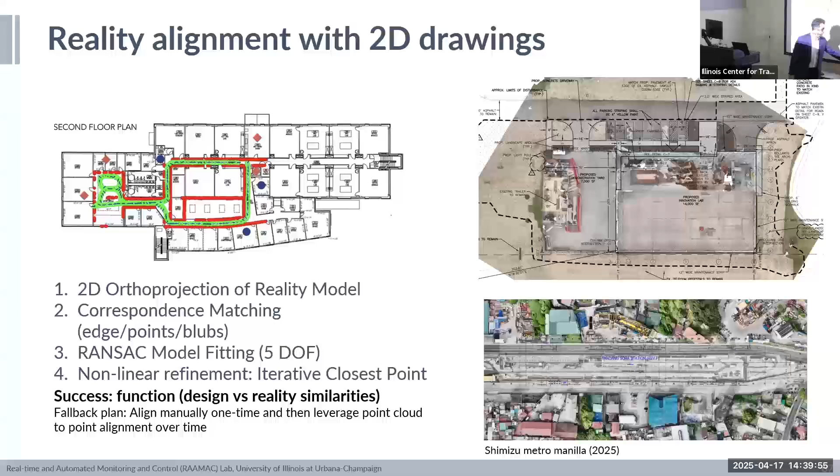Immediately when you bring the world of design and construction together, a few ideas pop in the head of people in construction. They say, can you help me identify my quality issues on the job site? One theory we've been working on is BIM-driven design coordination, meant to minimize rework items on the job site. But in practice, even though you do that coordination, people show up and do their installation based on their understanding of the design. Here's an example.

Here's a hospital facility in Virginia. The design dictated that the HVAC would have a riser and the sprinkler system would go under. But see what's happening? Subcontractors showed up and installed one straight piece. So now the system is flagging that location as potentially a conflict, so you can minimize the likelihood of this growing into a litigation issue.

Here's another example, concrete placement. This one is very common. Every job site has concrete placement, so people want to do quality control on that front.

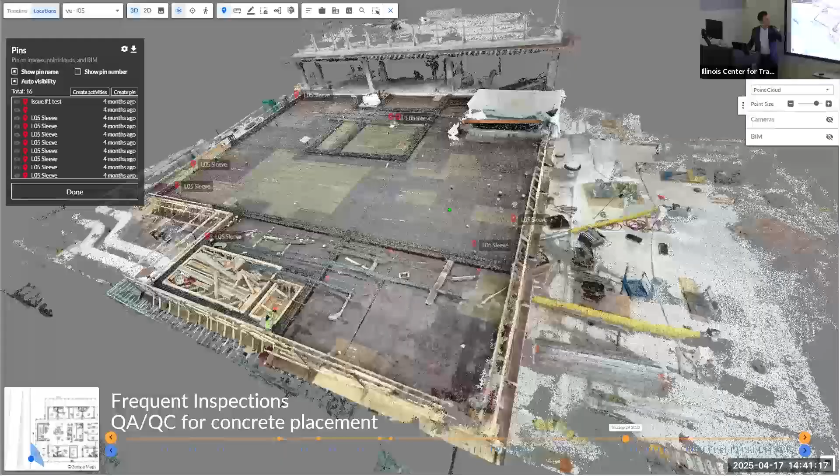Here, the idea is that you use your smartphone. That's the form factor of capture we recommend because everybody's carrying a camera. You walk along the rebar cage prior to placement of concrete. It usually takes about 30 minutes of compute time on the cloud - that's the optimal number we have in mind. And we can give you visuals that display the design over reality.

This is the same healthcare facility I was showing you moments ago. These are sleeves - for those who may not know, these are openings we create on the floor to route mechanical and electrical systems through. This is the healthcare facility.

That means if you don't catch these deviations, you place concrete and then come back and do what? You bring your drilling device and start drilling through concrete. Does anyone know how much any of these sleeves would cost? Make a guess. $2,000, $2,500 each. There's also a penalty for damaging the integrity of the structure, $10,000.

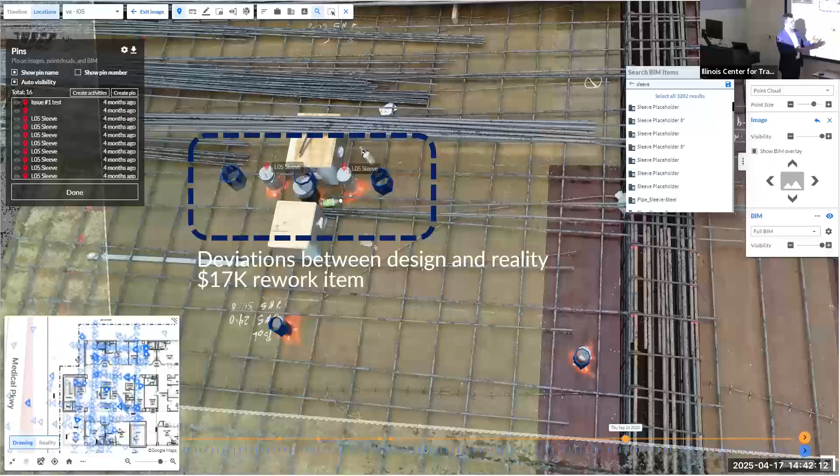Right here, you have a $17,000 rework item that can be caught simply by overlaying design against reality. This is unfortunately very common in Illinois - box outs, sleeves, conduits. A lot of contractors in Chicago want the ability to do this. This is a byproduct of what we created, but we learned from practice that this is something people love to do. They want to check the quality of their work, especially on lump sum contracts, for those who understand contracting too.

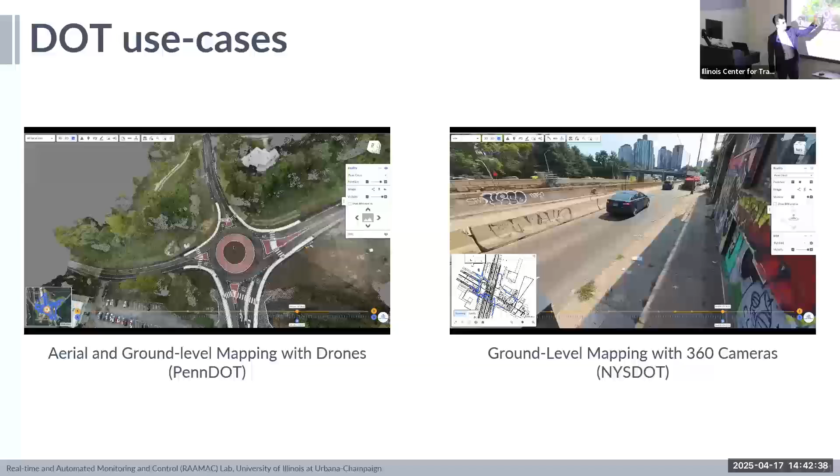Now, oftentimes I get asked, are DOTs also using it? As of now, 2 DOTs have actually scaled, and there are a number of other DOTs that have been using it. This is PennDOT, who've publicly presented both of these projects, hence I'm showing them on screen. This is New York Department of Transportation. Their use cases are slightly different - PennDOT is heavily interested in aerial mapping as opposed to ground-based.

New York is a totally different game. They want to do ground-based because they don't want the headache of legal issues associated with flying a drone - it's a simpler process. Sometimes they place these 360 cameras on ATVs and vehicles and cruise through the job site to capture. Our algorithm doesn't work that way - we only take 1 or 2 frames out of every second of capture. So we have to fine-tune these algorithms to make it cost-effective. It's just engineering, there's no science behind it.

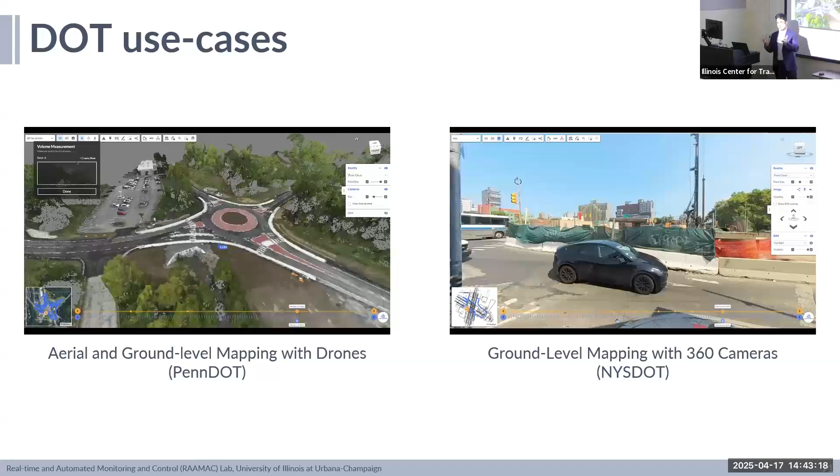Engineering the solution in the sense that we can make it scalable. What are the other examples from the world of transportation?

This is not a construction problem. All you need to do is go back to the design and, at the end of the day, update the design to make sure it's been updated for the reality of the job site.

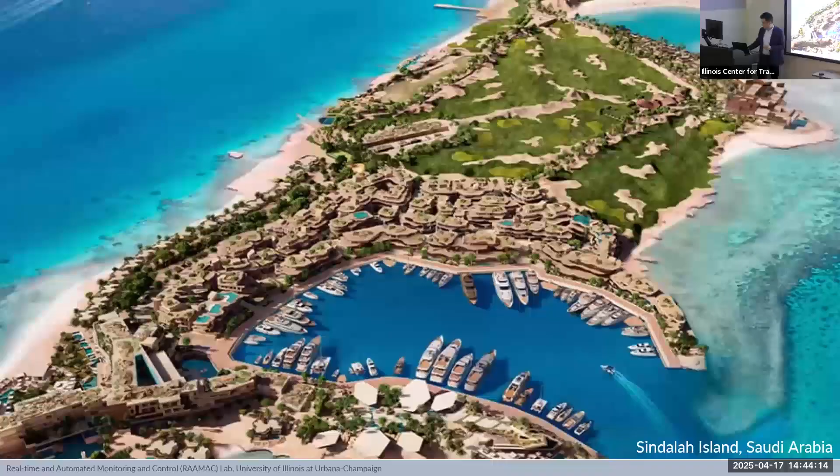Here's the challenge that they had. They had hired AECOM design firm to walk around the job site and perform an inspection on sprinkler heads. Let me remove the audio on this and I'll play it. And the count was inconsistent against the design.

The site happens to be about 2 hours away from the engineering offices, and there was pressure to get this work done. So they decided to go inside and videotape it, sit down, and manually inspect every one of these sprinkler heads to make sure they're actually satisfying safety requirements for getting this project open.

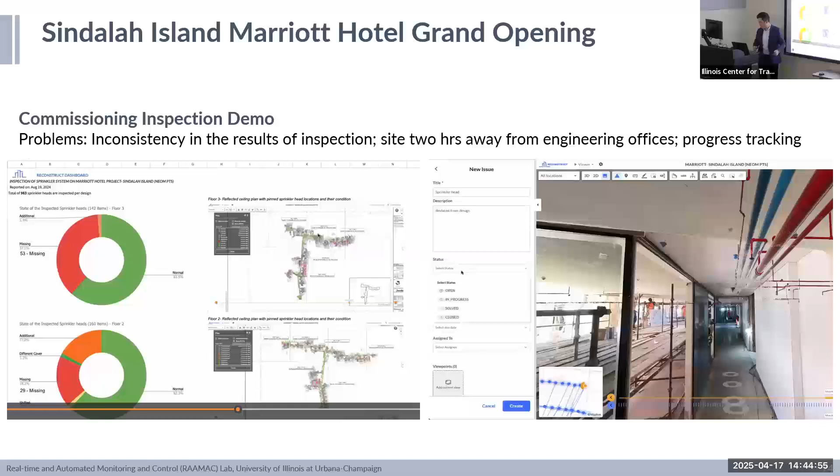So over here, you see a little bit over 980 sprinkler heads were inspected. The color coding here shows some of them are deviated, some damaged, some other issues. So there's a defect detection capability that was actually deployed on this job.

Now I want to show you a few more examples on the construction progress tracking piece of it. This is a project in Florida, the Broward County Convention Center. It's a development site that's been going on for about 5 years now, and this is phase 2 of that site, around 2020.

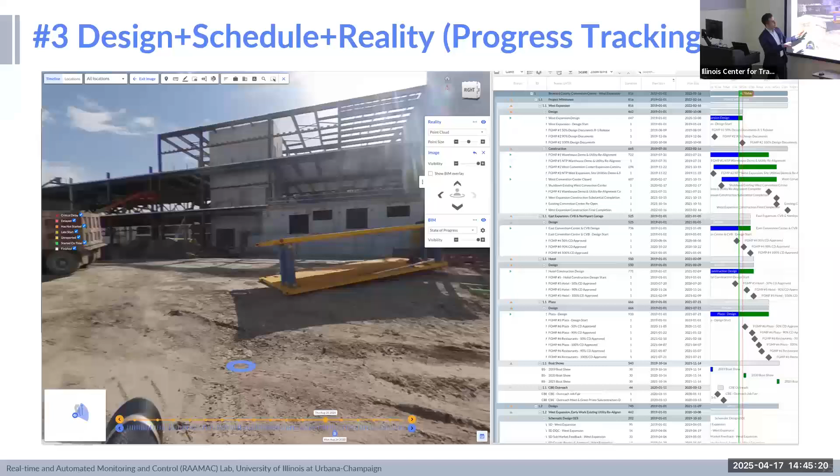The idea was that the owner rep wanted to have a risk assessment capability on his schedule. So they took these pictures, brought the design model, tied that against his schedule, overlaid it, and over time got color coding capabilities done.

These capabilities have been used beyond our initial intent of progress tracking, specifically for payment. This is actually that Microsoft job site. The idea here is you compare the design, you get a payment application from the contractor that tells you how much money they're going to be charging.

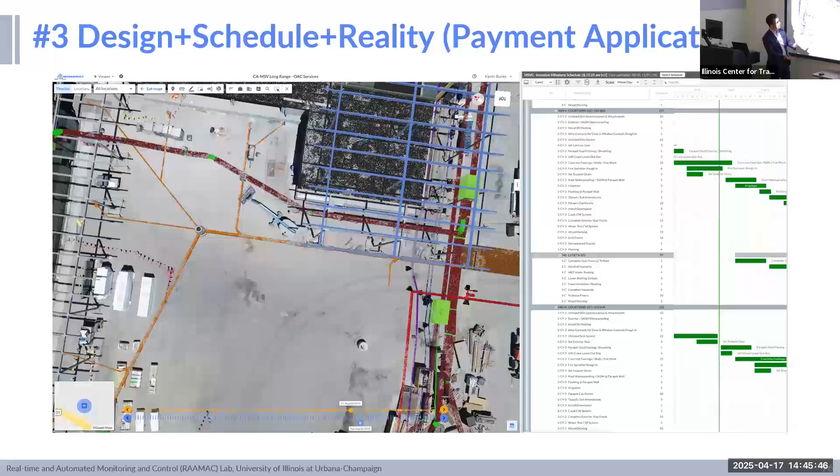And you can do a back-of-napkin calculation in terms of whether these numbers make sense, and expedite that payment.

Now you may say, are these 4D and progress monitoring capabilities really scaled to the world of transportation? I want to give you a snapshot of the reality. Oftentimes when we look at this from an academic perspective, we work with the 1% of the 1% of the market, the first adopters.

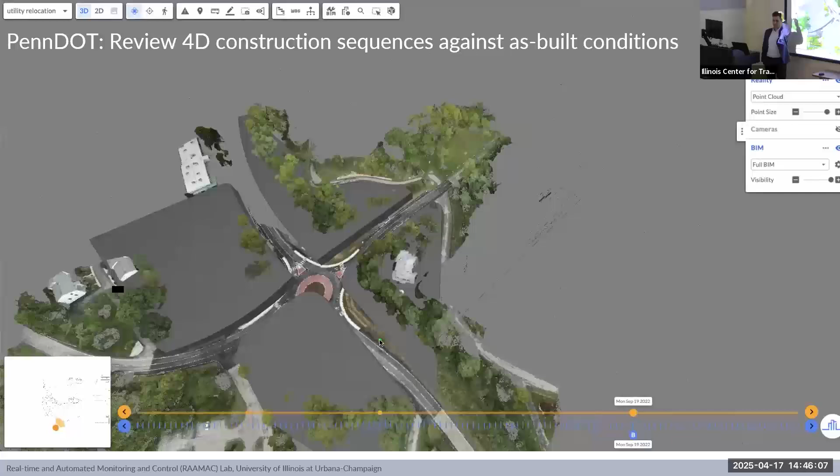But this is PennDOT, a really forward-thinking DOT, and you can kind of see our level of readiness on 4D is literally what you see on the screen.

This is 2022, and at best their 4D is putting a few boxes to kind of communicate the idea of sequencing. And I want to bring you back to one reality: when you want to bring a technology into the practice,

you always have to think about what is it that these guys can really, really use, and just take one step at a time.

You cannot take people from today's practices to something that's completely automated. You need to have this journey for the user to figure out how they can start ripping off values from various systems.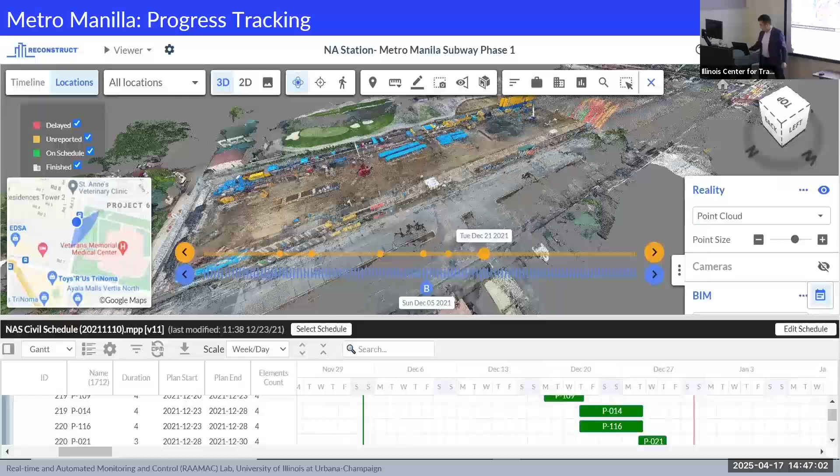You see the reality on top, and here's the color coding of the model overlaid on top of it. I'm happy to see Professor Erol here. This is something that you might be interested in.

They actually mapped out different layers for tunneling with colors. You have to help me understand what it is, but basically you see the 2D, you have the color coding, and they're actually looking at it in terms of the actual progress.

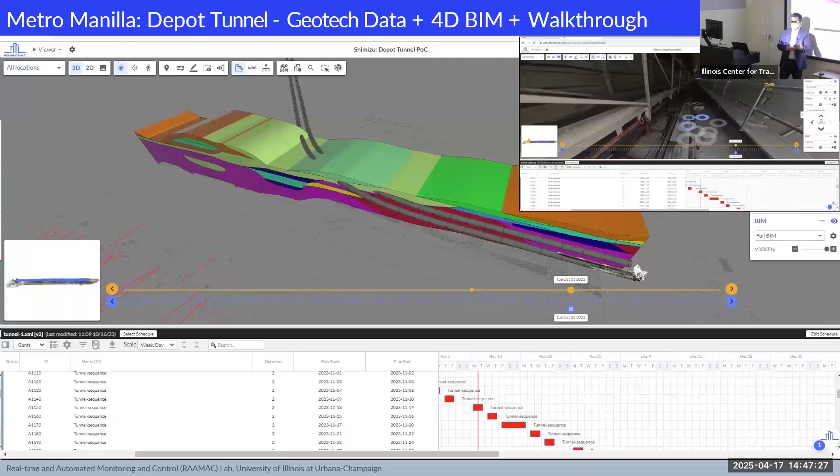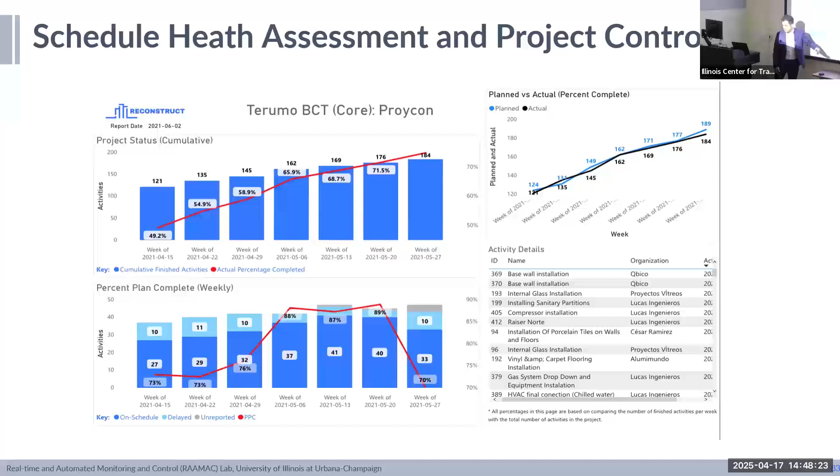And on the top, you can actually see examples of work packages that subcontractors are performing. Anyone from Latin America may recognize this company, Proycon. This is in, I'm forgetting where it is. I don't think it's in Mexico. Anyway, it's in one of the Central American countries. Basically, over here, you have the health of a schedule that they wanted to track. You see how many tasks are being allocated, how many of them are getting done, so you can start generating these dashboards.

And now this is bringing it back into the practice. When you have the visual data, when you have the reports based on the actual data, you can put it in front of the people. And that practice, where we're only reflecting about the past, becomes proactive. You show the future of the project coming up in the next few weeks, and this fellow works for the contractor that's placing concrete. He has all the incentives in the world to be part of this conversation, to help maximize productivity of the job as much as it does on their end.

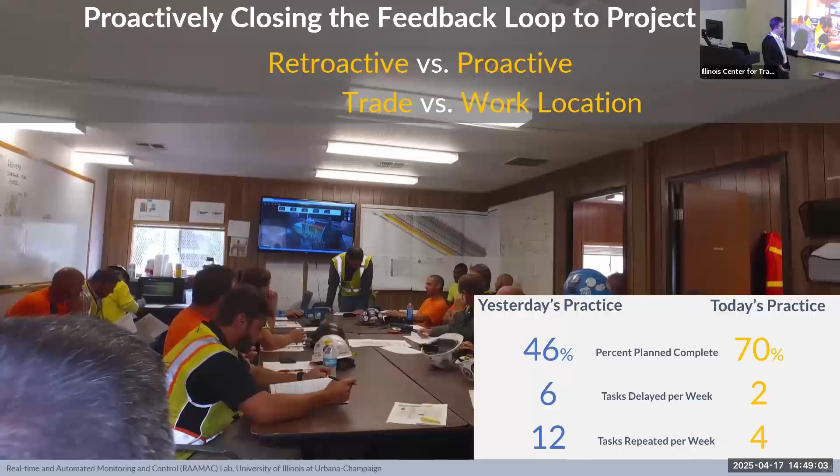We actually did a little bit over 18 months of research on this, and we published this. It's really rare for us to have data that is captured over a longer time period. So we are proud that we were able to take these guys from getting roughly 50% of the tasks done on a weekly basis to roughly 70%. 80% is really good. Imagine your advisor giving you 10 tasks. If you can do 7 or 8 of them, you're already on a high mark, right? So that's the same idea here on the job site. And we're able to minimize the number of times that somebody shows up and says, you know what, I need to do that again this week, and you bring that task over and over. So the same type of metrics that we use in construction.

I want to just quickly touch on a few questions that you probably have. One is, what about automated progress tracking? Our intellectual property for this technology is entirely on automated detection. My formulation for some reason changed, but I'm not going to cover the formula anyway. This is something that we patented and we acquired the patent to the company. This is our first idea that we published in ICCV and CVPR, which are computer vision events. The idea was, because we track progress and we have a geometry understanding of the scene, maybe we can reason about occupancy and visibility of the scene, both from an image perspective and a design perspective, map that in a probabilistic form and feed it into a very simple machine learning algorithm that can detect if an object is on a job site or not.

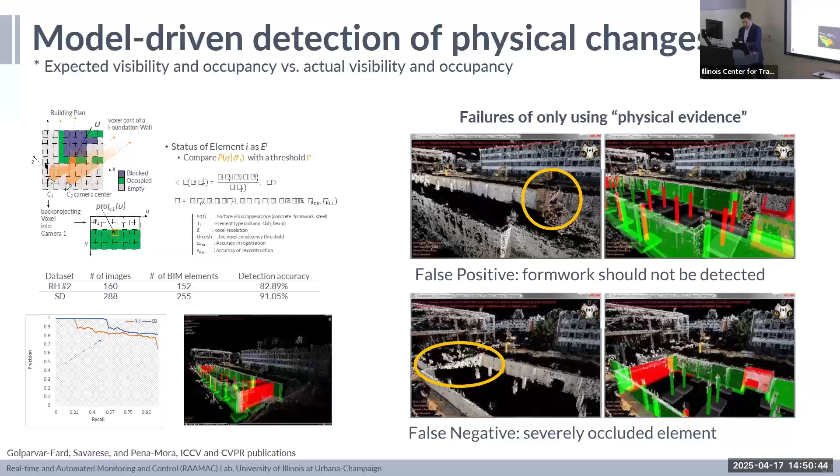And over time, we realized that our system, purely based on geometry, can make a lot of mistakes. Here's a false positive. What do you guys see highlighted here? Do you see formwork? The system thought that this is concrete. You see it color-coded in green because it wasn't able to differentiate the texture of concrete versus formwork. It was purely judging based on geometry. And if you have severely occluded components, which on the job site happen a lot, you're going to have other examples of issues. So over time, we thought, maybe we can go back to more computer vision and look into the visual appearances that we have in images and understand what it is that we see.

I want to show you an example of a very simple foundation wall. If you have a foundation wall, the stages that you have in construction are placing formwork, reinforcing it, placing concrete, finishing the surface. If it's exposed, you're going to do cladding. Otherwise, you're going to do waterproofing, water membrane, insulation, and backfilling. We need to learn every one of these representations on the job site. Two problems. In the construction body of knowledge, nobody's actually formalized these sequences. Clearly, it doesn't exist. The only person who's done it is Diego Echeverry, 1998, University of Illinois.

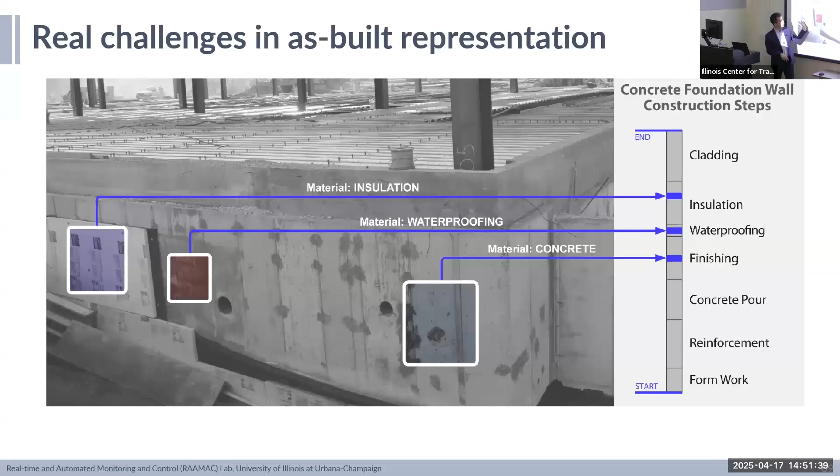He did his PhD here, way before I was also a student here. And it's the only publication that we have on formalizing these sequences from a data perspective. And two, where are we going to get the data to train these models? Also, I've already mentioned many problems that we have in the design, but when we design a wall, we only show a box in design. We don't actually model the layers that you should be expecting to be detected.

What do we do instead? We use metadata to represent these types of data. And of course, the scheduling, there's a lot more art than science in the world of scheduling. So that makes this process more complicated. Again, I don't intend to get into details.

The first step that we decided to do is to take what is now done with deep learning. At the time, this is prior to deep learning. So you see, this is our first algorithm in 2014. The idea was that we would create our own convolutional layers. This was actually 48 layers. And we vector quantize representations that we get from different textures. And then we feed into some supervised classification process to learn a model that can say brick versus non-brick.

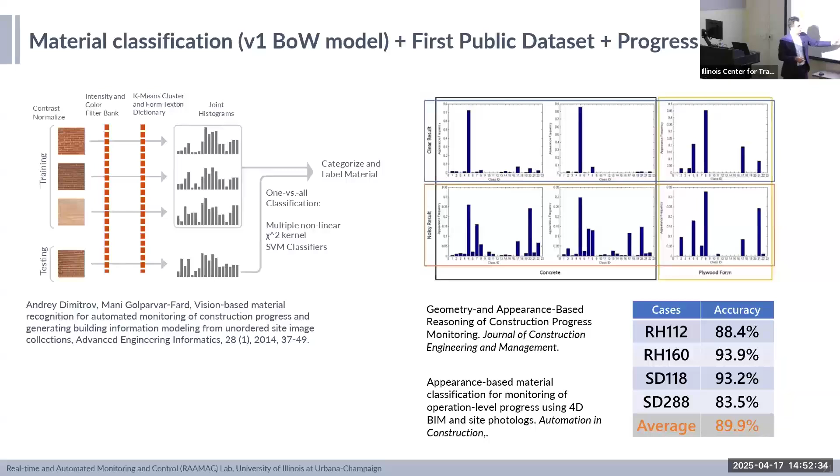And we can extend it to a multi-class classification. And we published a number of journal papers on how this works in construction. But then when you do this repeatedly, you realize that there will be more opportunities for you to take things that you're learning in civil engineering into the world of computer vision. We changed the way of thinking about material recognition, and we created an algorithm called geometry-informed recognition. This is a CVPR paper.

The gist of it is really simple. When you look into asphalt, do you expect to see asphalt on a vertical structure? No. You expect to see that on the horizontal structure, right? That knowledge alone can actually minimize a significant amount of confusion that these algorithms have on differentiating one texture against the other. So what we're basically doing is that macro texture and micro texture is being modeled. I'm not going to get into the details.

Instead of blindly applying deep learning, we actually took the last layer of deep learning, and instead of using a logistic regression, we decided to use a supervised support vector machine, mostly because you can easily fit the hyperplane that would differentiate these models. And for the first time, we showed that the way people have been thinking about material recognition in the world of computer vision can be enhanced by geometry, because nothing is designed randomly in the built environment. Everything is designed based on geometry.

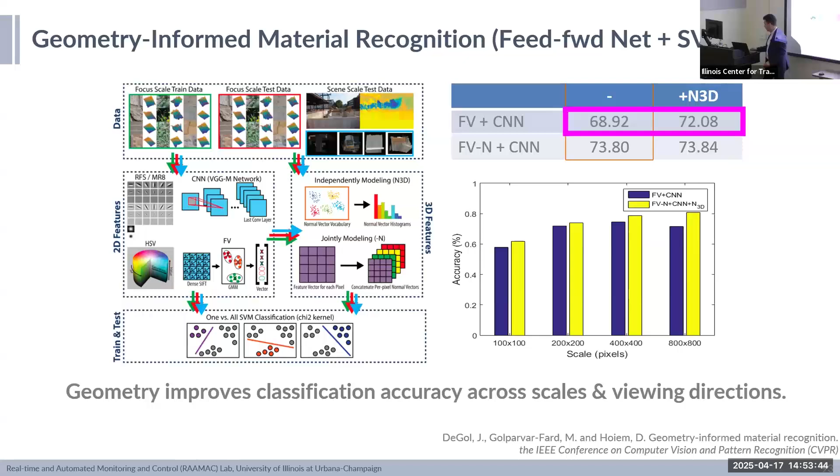And the data set, for those of you who might be interested, and the entire code is something that we've publicly made available. And this is the last piece of work to showcase for you how we bring concepts from theory into practice. The more we put these visuals and color codings in front of people, the more people come back to us and say, hey, can you tell me how I'm supposed to be revising a schedule? Because our only solution is throwing more bodies at work, which is not what we promote. You can change the sequence of the work, you can change your location, you can change many, many factors.

So we delve a little bit into natural language processing and vision models to automatically learn best practices of planning and use that as a base of planning. There's a number of new publications on that front for those of you who might be interested. So I want to summarize what I've shown you so far. There are 4 use cases. You take the visual data, you can track progress. You can use that as a base of quality control. You can verify payments. And down the road, you can use that for liability purposes.

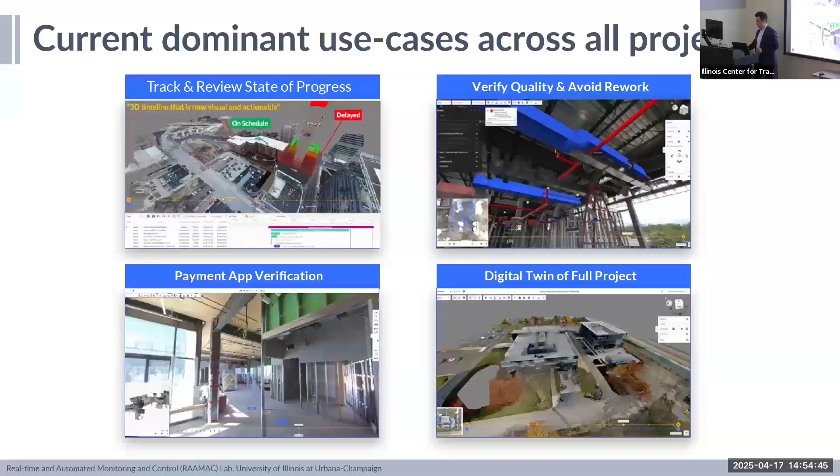And when you start thinking about it practically, it's no longer just precision and recall. The dynamic of people thinking about the solution completely changes from the moment that you present it to them as a professor versus selling that solution to them. The value proposition is totally different. So you need to make things more understandable by someone who's on the job site. What are those items? Cost and time. Those are the only 2 metrics, okay? Now, between cost and time, there are things that are more tangible and things that are not. And if you want to sell it, that differentiation becomes important too. The number 1 reason that people buy our software is because they don't want to walk the job site.

They want to minimize travel time. That sells for itself. What else? You can obviously do quality control. If you self-perform, there's a lot of value. If you have subcontractors that may file a lawsuit against you, you can save that lawsuit. This is actually on a General Motors facility. And of course, you can save your time by doing more quality control. And on scheduling, there are a number of other things that we've done.

I want to bring it back to things that we typically don't do. Many of us work on interdisciplinary problems. And from time to time, our thinking is we're going to be adapting these algorithms that we have in machine learning, computer vision, so we can make a contribution to the body of knowledge in civil engineering, which is a great goal in itself. But there are many, many moments that you can actually take knowledge from our own area and feed it back into the world of AI. And I showed you a few examples.

I showed you how you can bring the concept of design into improving reconstruction practices. I only touched on geometry and a little bit of semantics. I didn't get a chance to explain the interdependency that we have between the components. And again, here, you can flip the coin and start thinking about it from a different perspective. There's a lot that you can explore, especially for those of you in this audience, because you actually work from a design perspective. Everything in design can be used as a base of training for things we want to detect from the real world. Whether you are looking at it from a condition assessment perspective or construction, everything is driven by design.

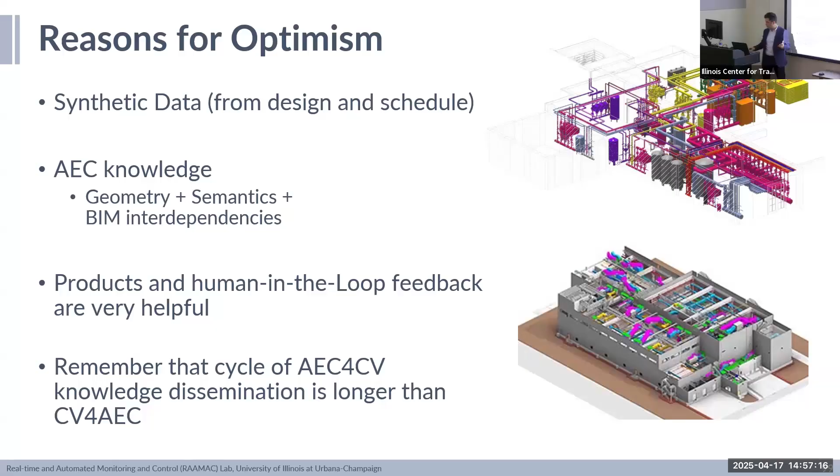So I'm not going to touch on ongoing research. I know I'm almost at time. I just want to wrap up to say, obviously, there's an army of people that have been behind this work that have made this happen. There's an army of people that support implementation of this technology across job sites, and they've all been part of this journey. I'd be happy to take any questions or comments you have on the engineering side of it, on the technical side of it, on the scientific part of it.

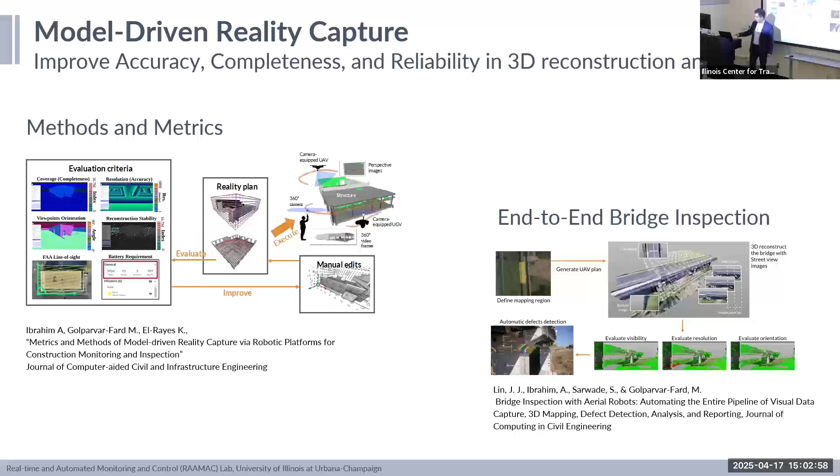Plus, they don't let you integrate with the SLAM algorithm that runs on the platform. So you have to have an independent algorithm for scanning versus localization of the robot, which defeats the purpose of using the ground robot in the first place. So as much as it's interesting from a theory perspective, in practice, you have these limitations.